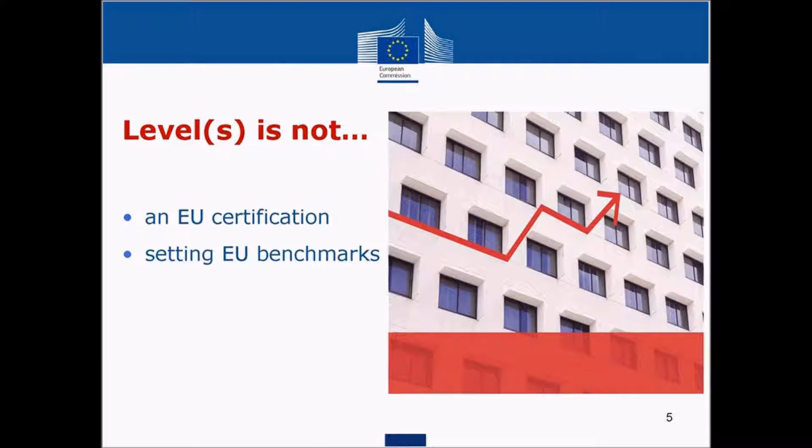So those are the six different areas we have, and to those six different areas we have indicators linked to them.

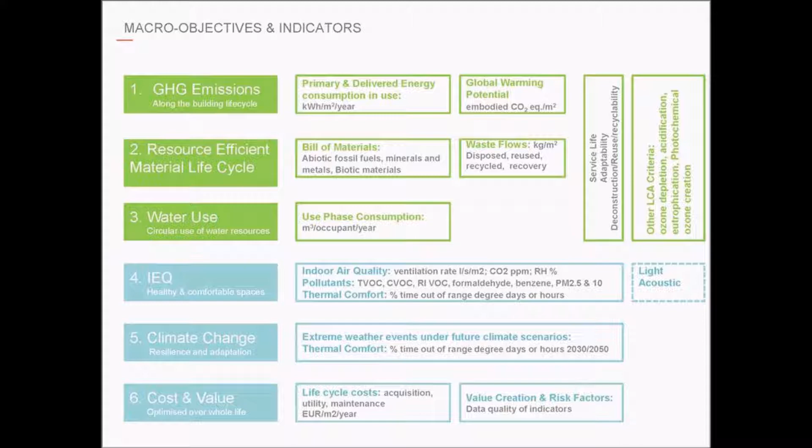During the development of levels, we realized we needed to provide not just one way of working with indicators, but 3 different levels. The first level targets the mainstream market, which isn't used to assessing building performance beyond energy efficiency but wants to get started. These projects may not have access to very specific data, but they still have useful information, and using level one, you can see how different decisions impact building performance and how you can work to improve them. Then there are 2 other levels you can use for a more specific assessment, and even to optimize your design later on.

Levels was developed between 2015 and 2017, and it was a huge collaboration between different groups of building professionals. It was a very interactive process with several rounds of consultations, and that's why I think it's a very good product.

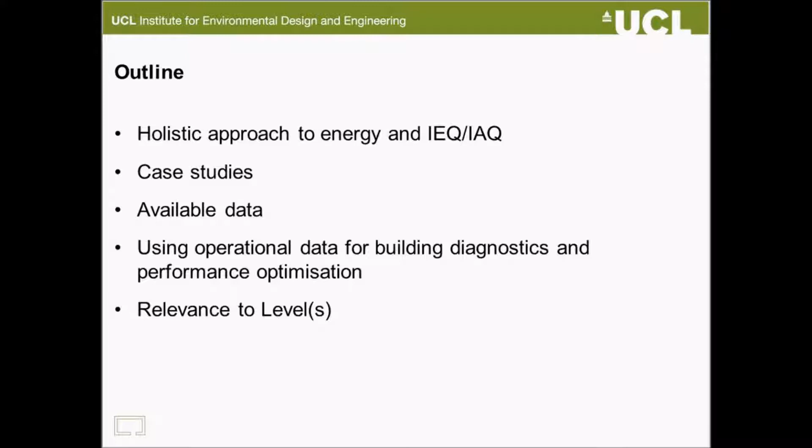The idea is to provide a holistic approach to energy and indoor environmental quality, with special focus on indoor air quality, which is quite topical at the moment in the UK and many European countries as a result of outdoor pollution. But I'll also show you one example to signify the importance of internal sources of pollution as well, covering a couple of case studies, available data we collected from this project, and relevance to Levels.

Judith already referred to the problem of unintended consequences of energy efficiency policies, and this has been the focus of a number of our research projects: overheating problems, for example, in airtight new buildings, and problems to do with indoor air quality, and so on. So the idea is that relatively quick wins from implementing energy efficiency measures might bring unintended consequences, some losses in indoor environmental quality. So the idea is to view energy as the input to the environmental systems of a building, and indoor environmental quality as the output. We really need to take into account the total performance of buildings.

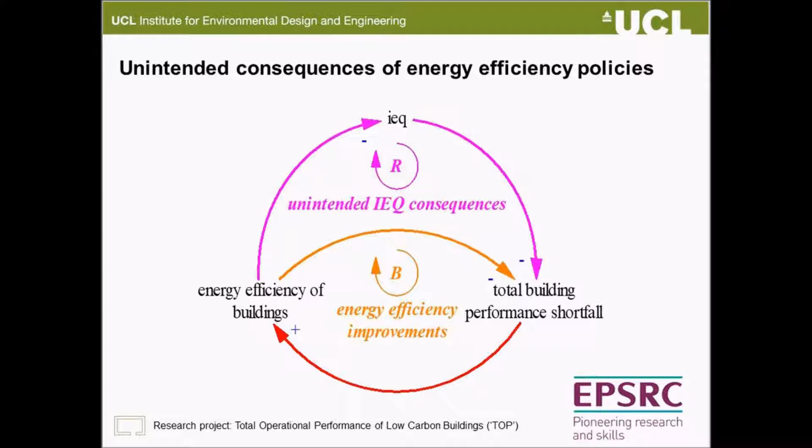subject to performance contracting. Again, performance contracting was touched on by Judith in her presentation. And the idea was basically to try and guarantee a certain level of performance, energy performance within this contract, to tackle the problem of the energy performance gap, which is quite endemic in the industry, the discrepancy between actual operation of buildings and design intent.

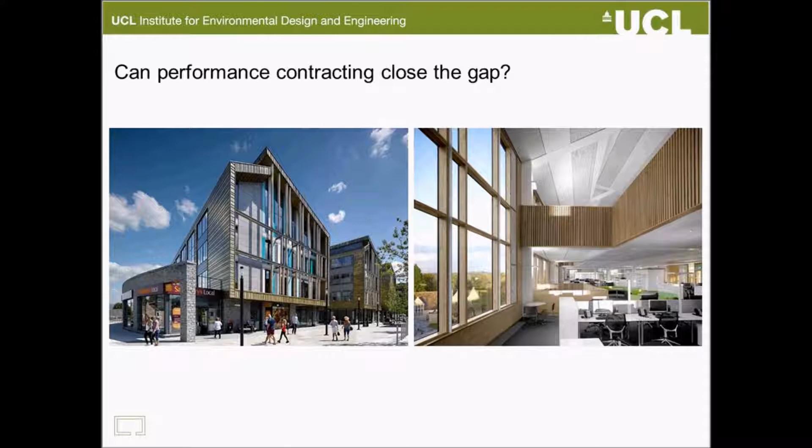So from a process point of view, this is a very important case for us, and we would like to see the results. The asset rating or energy performance certificate of this building was A-rated, and the idea was to have the display energy certificate, which is basically the operational rating of the building based on actual data, A-rated as well by the second year of operation.

Now what happened, as you can see, they didn't quite achieve that. They got a B-rated operational rating, which is quite good compared to the rest of the building stock, but there are still some lessons to be learned.

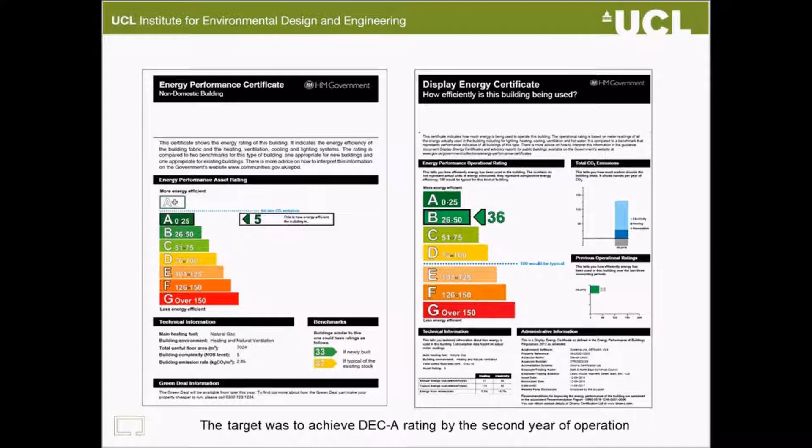And as a matter of fact, the main contractor in charge of this project has quite recently delivered another project in the UK, and in that project, again, they had this operational rating of A as target, and they managed to achieve it. So it's a learning curve. It's a very good project in the sense that there are very useful lessons to be learned and to scale up for wider application in the industry.

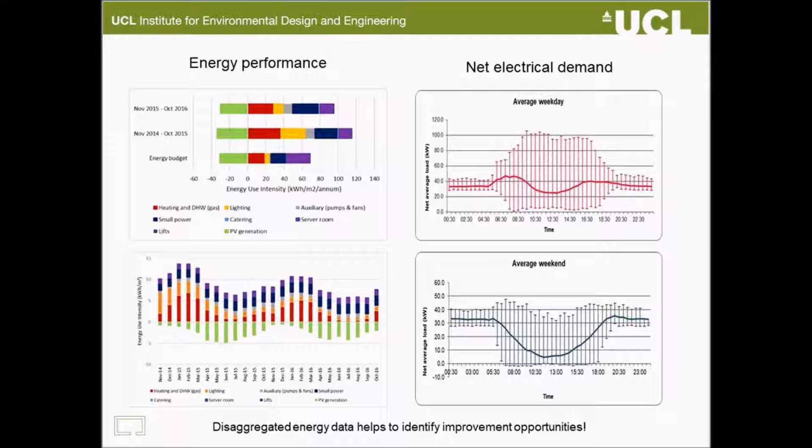So this will inform further energy saving scenarios and optimization activities. So in terms of energy performance, they are doing very good, if not 100% in line with the design target.

But what we uncovered in this building was issues around indoor environmental quality, which were not quite guarded within that performance contract, unfortunately. So, for example, the CO2 concentration level on one large open plan zone of this office building were frequently above 1500 ppm, which is not deemed to be acceptable as a result of some malfunctioning sensors.

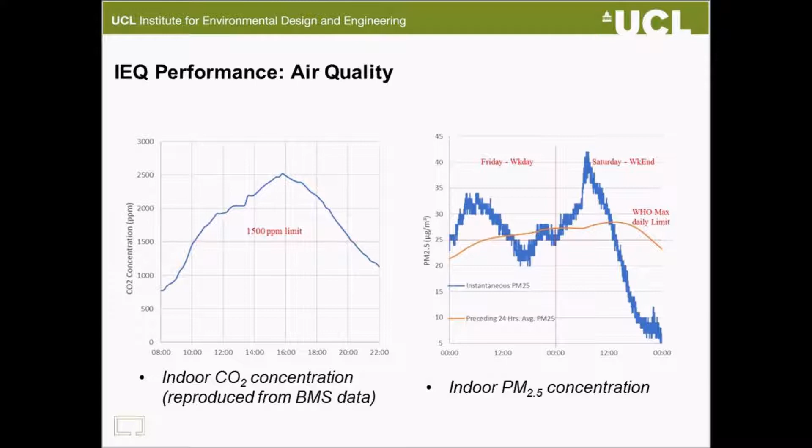Given the building is subject to performance contracting, this was quite insightful. Also out of range values, and I was quite happy to see within the levels framework, going through the spreadsheet and the KPIs developed, that out of range values are quite important in terms of levels. And that's exactly what we try to do here.

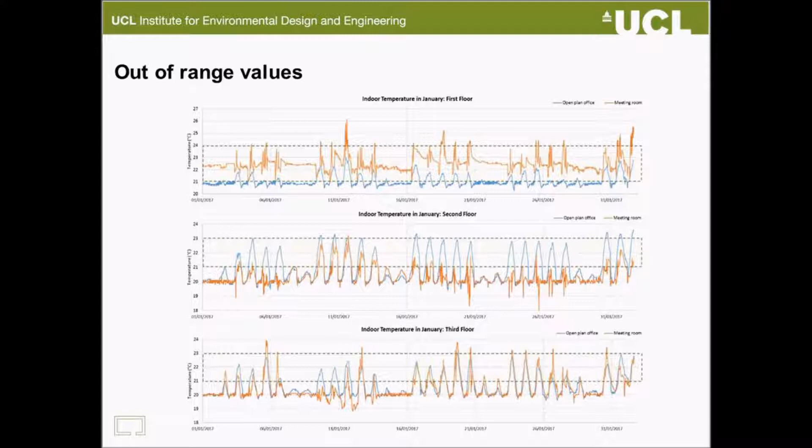This is the outcome of the thermal comfort study we did. For example, on the second and third floor of the building, the temperatures are relatively lower than the acceptable range for office buildings, which helps with heating energy budgets, but it's not good for thermal comfort. So you can see the conflict between energy and thermal comfort, and we can quantify these out-of-range values as a total percentage of temperature or relative humidity outside the thermal comfort range.

In terms of air quality, we followed the detailed analysis carried out as part of Annex 68 of the International Energy Agency's Energy in Buildings and Communities program, which highlighted major indoor and outdoor sources of pollution and contaminants of interest that could have high concentration levels in low energy buildings. A number are sourced from outdoors, like microparticles, nitrogen dioxide, and benzene. Some are predominantly internally driven, such as VOCs. We captured all these species within this project.

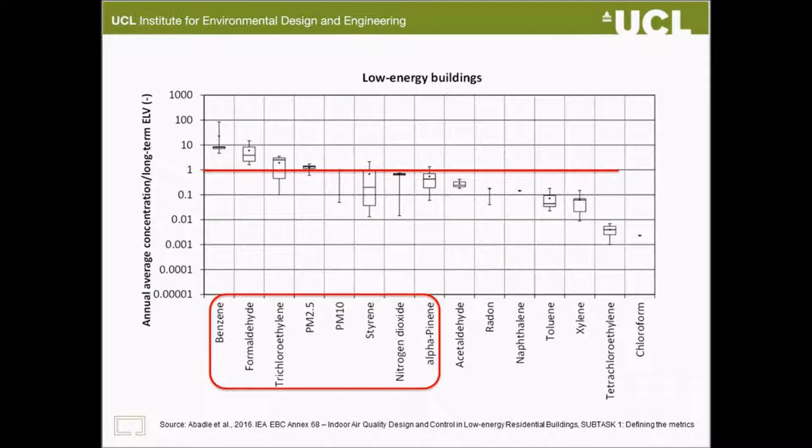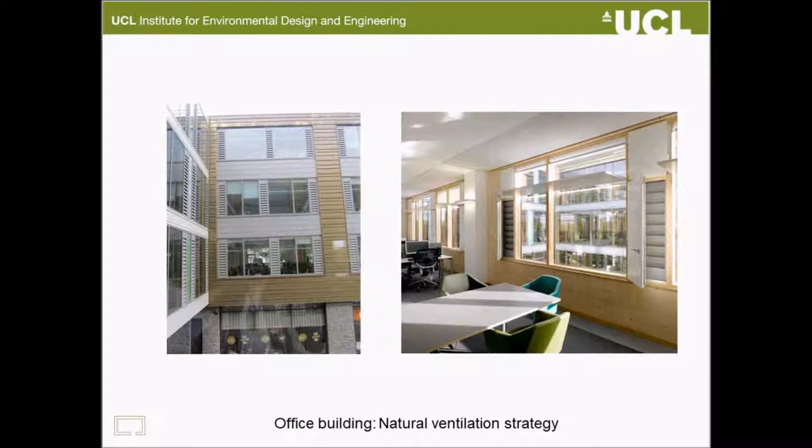In the case studies, this is our office building subject to performance contracting, with a naturally ventilated strategy. On the right-hand side is indoor, left-hand side is outdoor—you can see the louvers, manually operable windows, and at higher level, automated vents. What we managed to capture through data collection was quite an interesting interplay between concentration levels of CO2, which is conventionally used in the industry as a proxy for indoor air quality, and other contaminants.

Here you can see the NO2 results, and the same applies to PM2.5. The same zone which had problems with automated vents, with high CO2 levels close to 2,500 at peak, actually had the lowest NO2 and PM2.5 levels. This brings the opportunity to optimize control strategies based on outdoor pollution, not necessarily only on indoor concentration of a species like CO2.

This brings the idea of optimizing natural, or indeed any, ventilation strategy based on health indicators and various proxies of indoor air quality, as opposed to a single proxy like CO2.

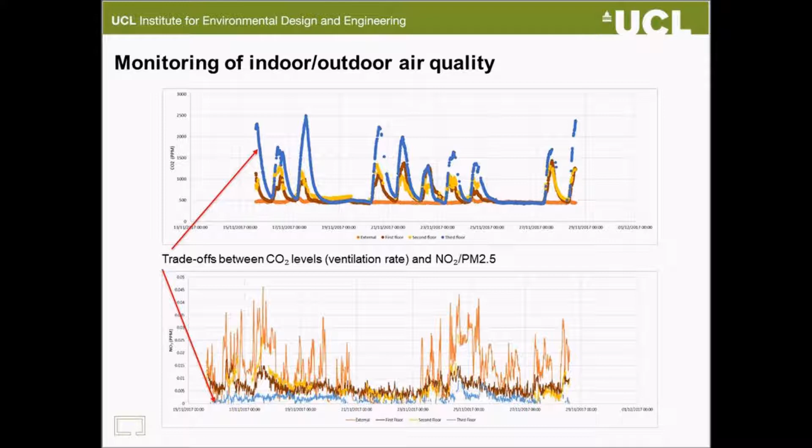Another case study—this one is not an office building, but it's still quite important to signify the issue. It's a hospital building we monitored with full mechanical ventilation. You can see the stark contrast: CO2 levels are quite low, with a maximum of 800 ppm. Compared to the previous case, it's fantastic.

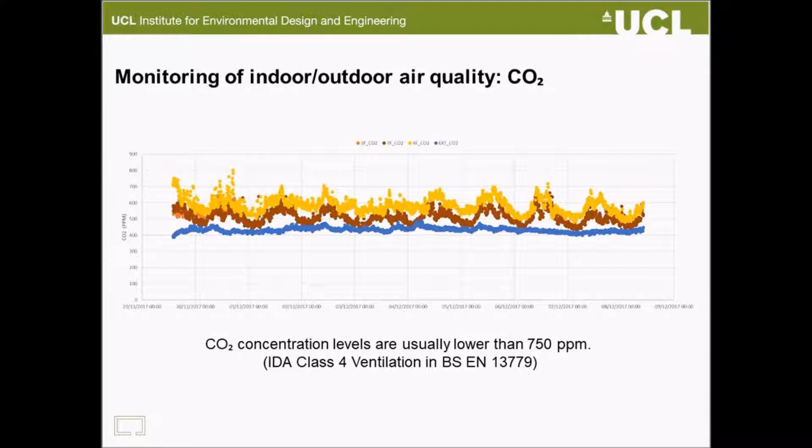However, the question is: is CO2 the only proxy? According to mainstream industry practice, projects only monitor CO2. But let's proceed—if you also monitor microparticles, PM2.5, again fantastic air quality if you take PM2.5 as the proxy. Indoor PM2.5 levels are significantly lower than outdoor, almost negligible, and below standard limits. Great, because you have high-grade filtration within the air handling unit.

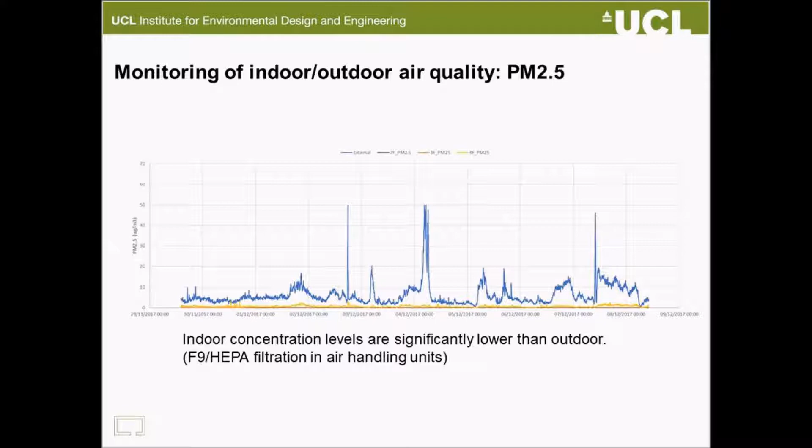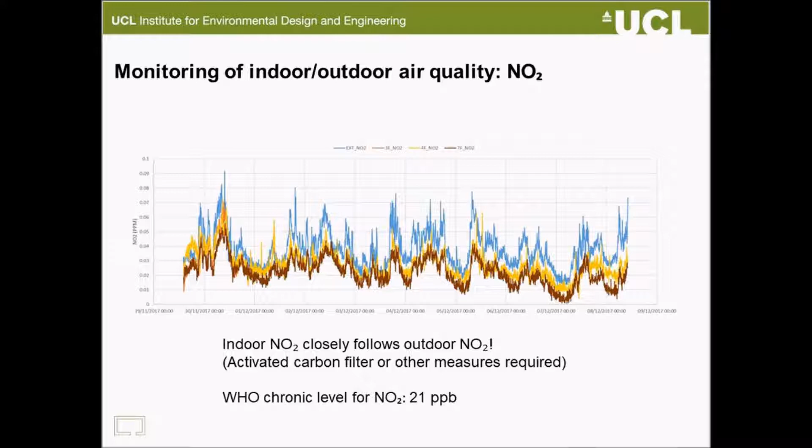You really need a chemical process—for example, activated carbon filters to reduce NO2 levels. As things stand, there's no control over NO2, and levels are very frequently higher than the WHO limit of 21 parts per billion. This gives you an idea how, if you go beyond one or two contaminants and capture the whole spectrum of critical contaminants, you can identify problem issues and formulate improvement or optimization opportunities.

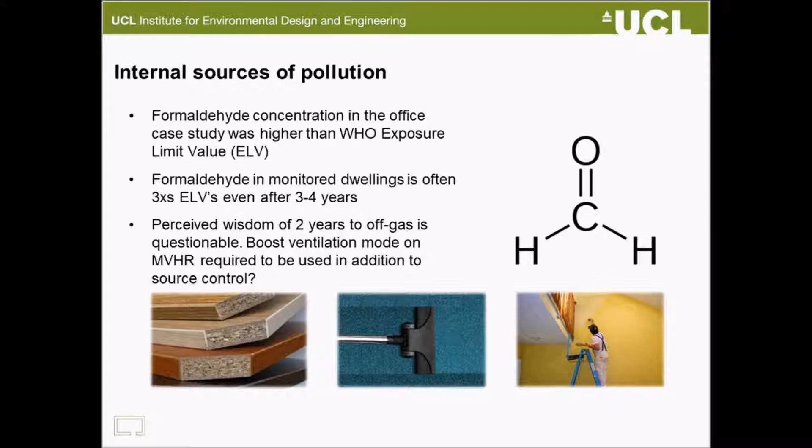One final point on internal sources of pollution, which could be quite relevant to architects in terms of material selection: we monitored formaldehyde concentration levels in all case studies, notably in our residential buildings. Very often formaldehyde levels are significantly higher than WHO limits—almost three times, as you can see in a couple of flagged examples. So benzene and formaldehyde levels are higher than WHO limits, or Annex 68 of the International Energy Agency, which is underpinned by WHO limits. In terms of source control, material selection, and VOC emission factors of materials, the industry is not quite there yet.

And the evidence emerging from this project is actually reinforced by other studies coming from Annex 68 of the International Energy Agency program as well. So the entire statistical sample that we hold for Europe and North America shows formaldehyde concentration levels are actually higher than the standard limit.

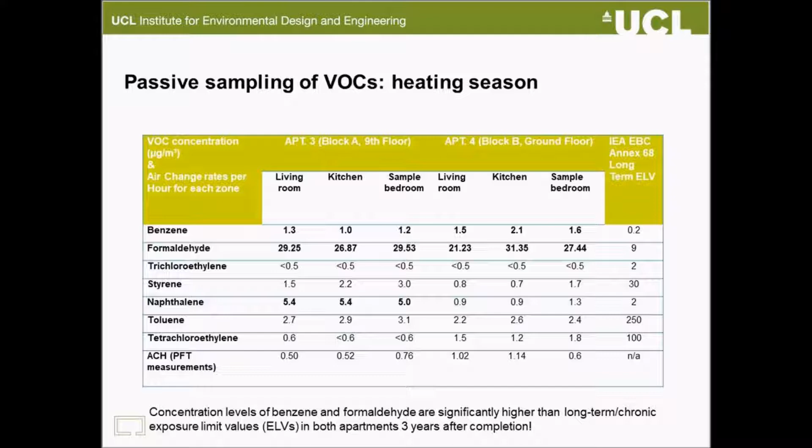This is a major issue that should be taken into account at design stage for every project, in terms of engaging suppliers and material selection, but also more broadly in terms of specifying stringent limits for suppliers and manufacturers. So very briefly, to conclude, energy performance contracting has proved very effective to close the energy performance gap.

However, the suggestion is also to take into account environmental performance gap and move towards energy plus environmental performance contracting. In terms of outdoor sources of pollution, there are opportunities to improve existing ventilation strategies in the industry to optimize health and well-being in addition to energy.

In terms of VOC source control, and more importantly, the most important VOC in terms of health impact is formaldehyde. We really need to strengthen the existing standards, but also existing delivery methods, and make sure the industry is quite there in terms of reducing the emission factors for various VOCs, including formaldehyde.

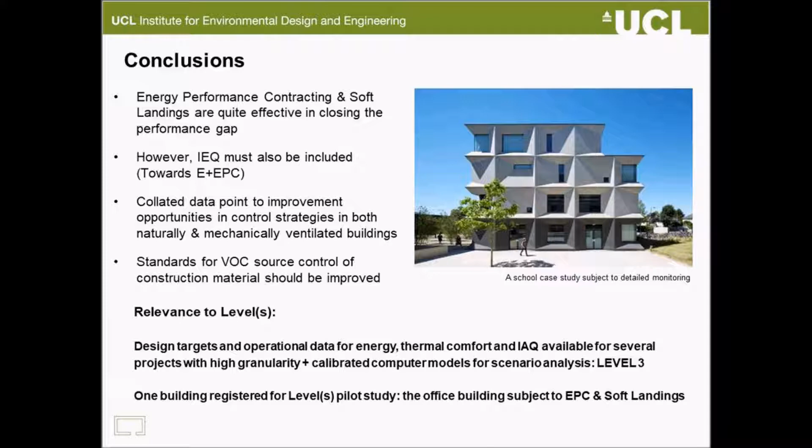Relevance to Levels, I've already touched on it. We are going to basically upload the data that we gathered for two case studies from our research program during the testing phase of Levels, and hopefully we'll be able to give more structured feedback in terms of consistency between data capture and Levels structure later on, maybe in another webinar. Thank you very much for your time, and I'm ready to answer any questions that you may have.

Thank you, Ehsan, that was wonderfully insightful. I just wondered, very quickly, while we wait for any questions from the audience, so much detailed data might look a bit scary to architects who tend to be more generalists.

To what extent, especially in the context of the development of the Smart Readiness Indicator, do you think it might be possible for smart equipment and services to report on this kind of data in a more user-friendly way, so that lay people might get their teeth into this as well?

Well, that's a very good question, and to be honest with you, we still have a significant gap in the industry in terms of sensing, monitoring, and control of these devices. Having said that, there is very good equipment now in the field that could at least give us a holistic view of total VOC, if not individual VOC, so TVOC, which is very useful to give us an indication of performance trends.

CO2, of course, is established in the industry. In terms of microparticles, again, there are very good sensors that could be integrated into the existing control strategy of new buildings, because again Levels focuses on understanding primarily new buildings. So we could incorporate relatively cost-effective microparticle sensors into the BMS system.

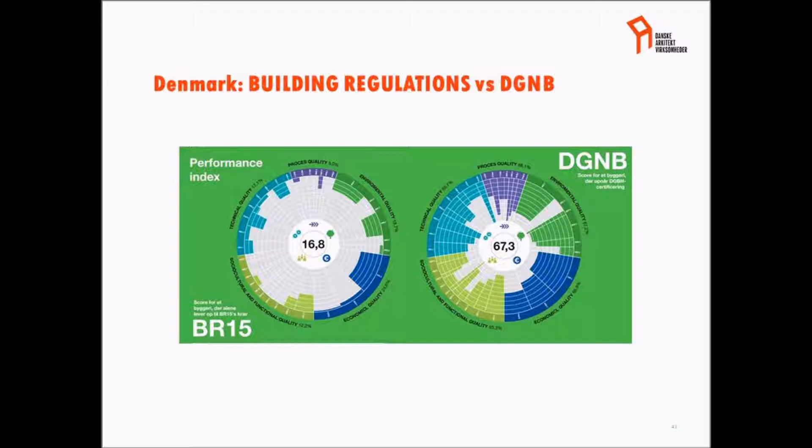The problem with that approach is that the high-level certification systems cover only a tiny fraction of the market, and most clients are content with just living up to the building regulations. So the really important question is, how do we get the mainstream to achieve more? That's where we hope Levels come in.

So what we need to achieve is an intermediate system which has lower complexity than the high-level certification systems, achievable with less time and less cost to the client, but where we still achieve a high degree of value. This intermediate system sits in between the building regulations and the sustainability certification systems. This is really where we see Levels coming in.

We also think this is really important because Levels can generate a common language, and we think we can integrate this with the building regulations as a voluntary sustainability class. This could be a really efficient way to motivate clients and consultants to achieve more sustainability in the built environment.

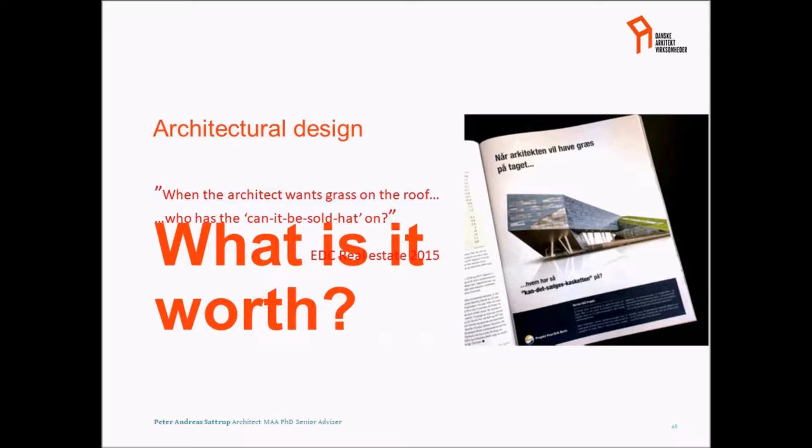So just to discuss what the opportunity really is, I think we need to discuss values in more general terms, and what sustainability in architectural design really is. We have an effort at the moment among Danish architects to document the value we actually produce for society and for clients, because we're always encountering skepticism. So what kind of values does architecture really produce?

Is it social cohesion in the built environment? Is it about generating generous spaces, lots of daylight access, and so on? This is a very famous instance by Bjarke Ingels architects, which is very popular among architects.

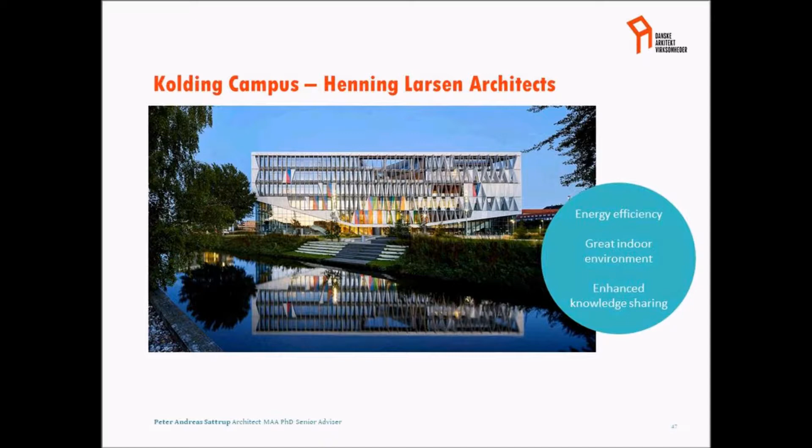You can also point to energy efficiency. This is one of the first near-zero energy buildings by Henning Larsen Architects, where we used the voluntary energy classes from the first issue of the EPBD. We can also take it a step further.

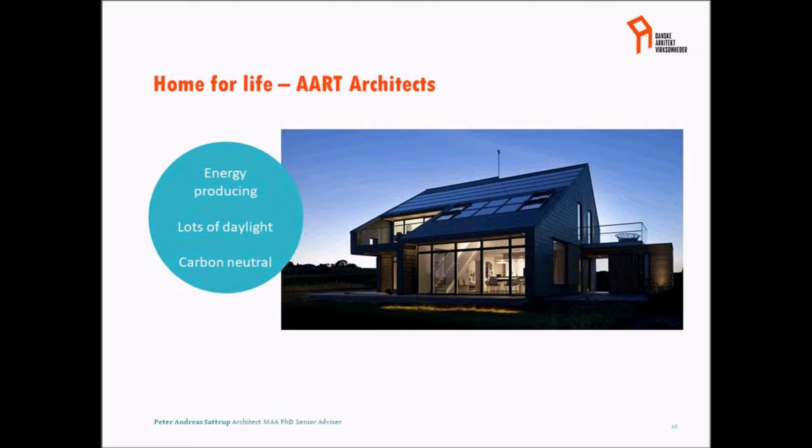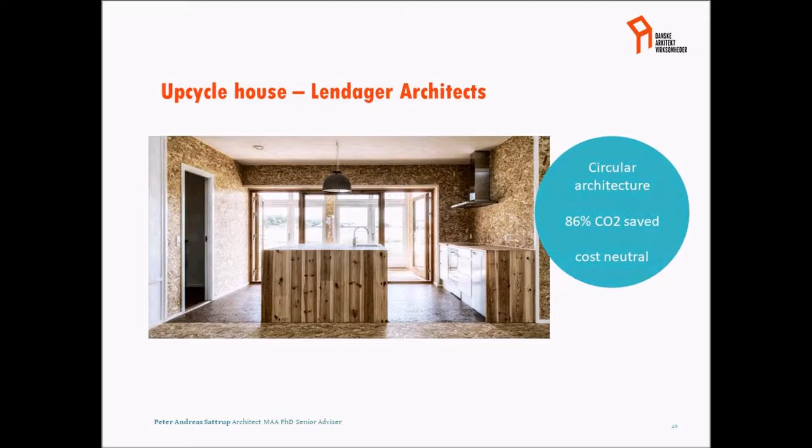So as you see, there's a lot of different philosophies, and some architects would argue that if you produce something so spectacular, popular, and durable that people love it and it gets listed from the beginning, that is also an aspect of sustainable architecture. And I would agree to some degree.

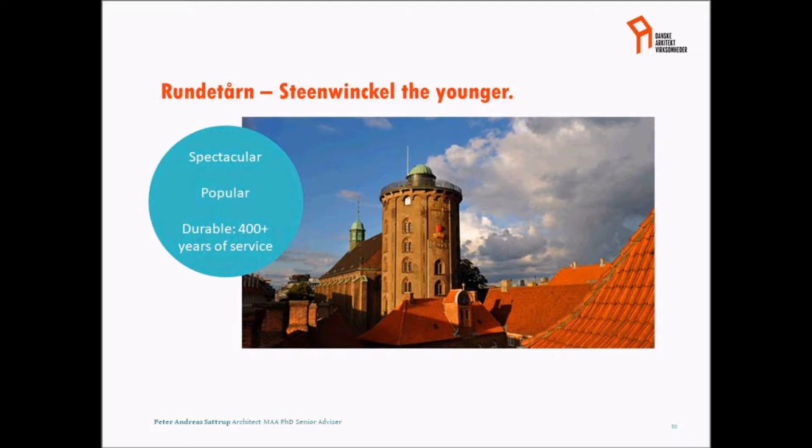But the real issue is that when we talk about value, it's both about the meanings and the political, aesthetic, ethic values that architecture represents, but it's also a question of measuring performance. And I think this is where we really have to achieve something.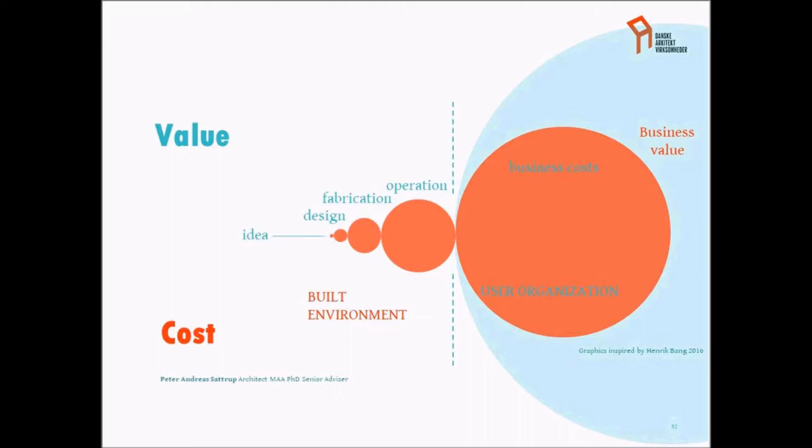We also work on the assumption that the values buildings actually generate really grow in time, and we're only beginning to map out the actual values generated in the life cycle of a building. I think levels could be very useful here because it has this life cycle approach, so we need to look not only at cost and how we manage resources, but also at the benefits we generate. This is a crucial point for us, looking at value in different dimensions, not only economic value.

The really important thing is to go through the entire life cycle, from when you program the building, design it and build it, to going back to the 'crime scene' and measuring what actually happens, both in environmental terms but also social and economic terms. We need this framework, and I think levels is really the important first step here.

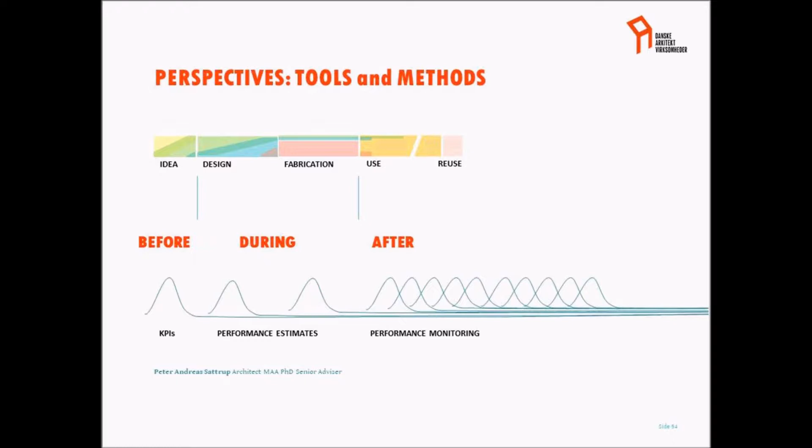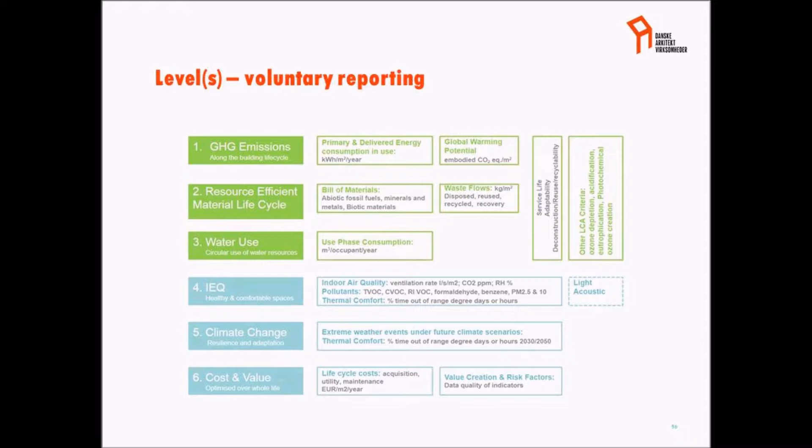So we're beginning to figure out what tools we need to document both costs and benefits at different stages of the life cycle. There's a very high degree of overlap between what levels proposes and the basic idea of what's essential in sustainability reporting. So this is levels translated into our way of thinking.

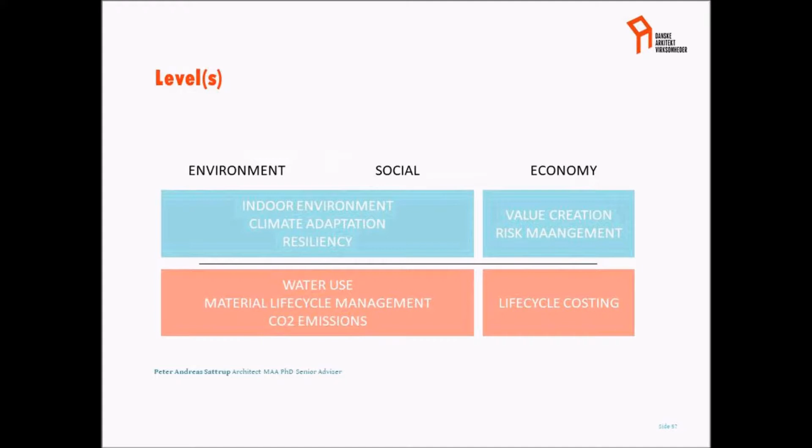What's really important in this testing phase is that we begin to discuss what is the intermediate level that balances complexity and value in the best possible way. The design of levels, where you can work with different levels of detailing, is really intelligent. There's a need to develop digital support tools to make this easier in practice, and we still have to do this.

Maybe at a national level, also by inviting commercial operators to help make things easy. This is really crucial for us. Then I think we need to work on awareness and figure out how we can create the right incentives, because if no one asks for this service, it will not happen.

And if clients don't pay for this extra, for documenting these extra benefits, it will be difficult for architects. So we need to create this awareness, and be very systematic and methodical about documenting the benefits that levels can bring. That's what I wish for the process, and I'm happy to discuss this further and possibly contribute during the testing phase. Thank you very much.

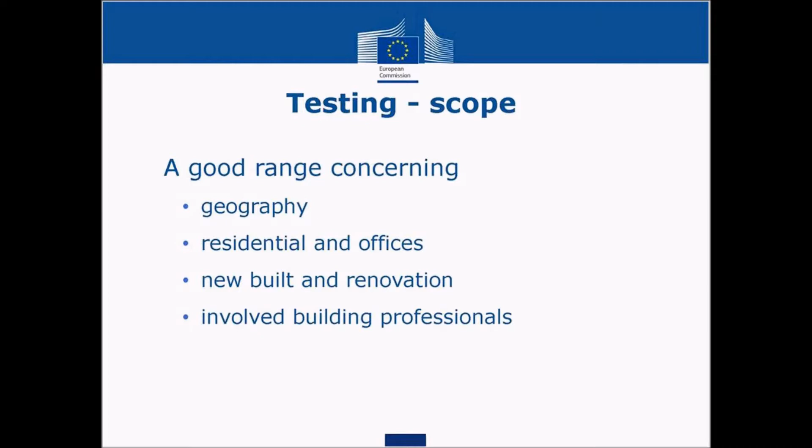Levels can be tested on either ongoing or finalized building projects where there is sufficient information available. Again, coming back to the question of having a good distribution of projects between office, residential, new build, and major renovation.

So what would be tested during the test phase? We haven't gone into details during this webinar about the different indicators - there are about 10 of them. We understand that most building projects will not look at all the different indicators during the test phase. So we have focused on 5 of those indicators, which we believe form the basis of levels, where we would like most testing projects to work. For the other ones, we need to see that enough building projects are testing them as well, but the 5 listed here are the ones we believe are the core ones. I won't go into detail on those, but we have identified them, and we have specific guidance notes which explain why we believe these are the most important ones for the test phase.

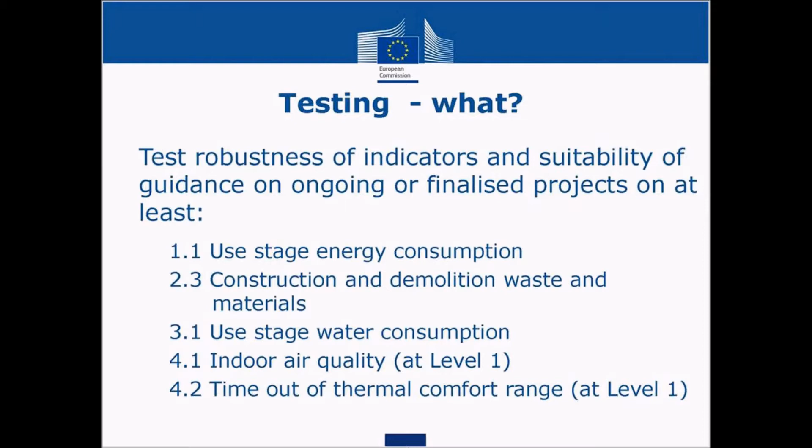How would you do it if you're interested in levels? You will actually agree with us, the European Commission, to provide certain feedback on your testing - on the indicators themselves, where we have a specific common reporting format to collect that information, but also on your general experience, where we would have a specific survey to pick up some of those aspects. For example, questions around how much effort did you need to put into it? Did you find the indicators useful?

Did you learn anything when you were using the indicators, etc.? And if you commit to provide this kind of feedback to us at the end of your testing, then during your testing, you will access technical support from the Commission side. So we have a technical help desk which is up and running. We host regular webinars, with the first one in a few weeks' time. We will have a platform where testers can exchange information.